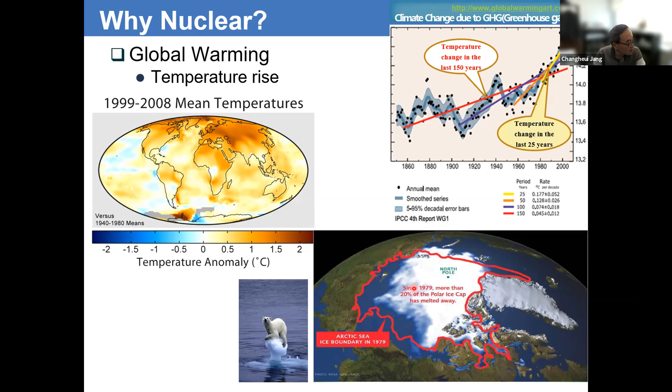So here is the trend of global warming. We know that the temperature of the globe is rising, and we see some of the famous pictures describing the reduction of the polar ice. This causes problems for many animals, but humans are also affected by global warming.

We know there are several substances that cause global warming, like carbon dioxide, methane, and nitrous oxide. Many of these global warming substances are emitted by power stations, transportation, and industrial processes. The major part of these can be substituted by carbon-free electricity sources.

Here is a graph showing the lifetime emission of greenhouse gases for several different sources of electricity. We know that coal is notorious for carbon dioxide emission, and even though natural gas is less than coal, it still emits a substantial amount. Surprisingly, even solar photovoltaic has a quite significant amount of carbon dioxide emission because of the fabrication process of those cells.

Even though photovoltaic doesn't emit carbon dioxide directly, the fabrication process and the disposal and removal of photovoltaics involve significant carbon dioxide emission. Compared to that, biomass, nuclear, and hydro relatively have a lower amount of carbon dioxide emission. Among them, nuclear has the advantage that there is no greenhouse gas emission and no pollutant, and the energy density of the fuel is quite significant.

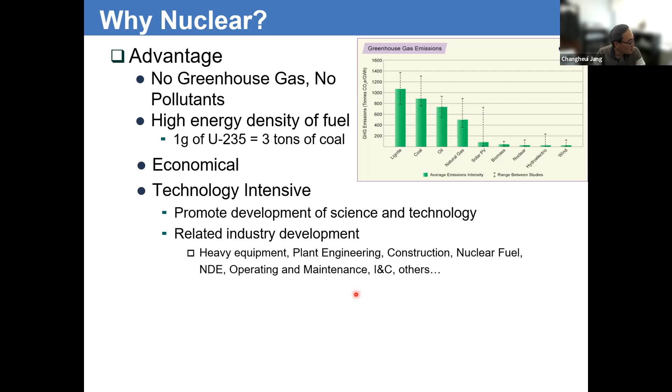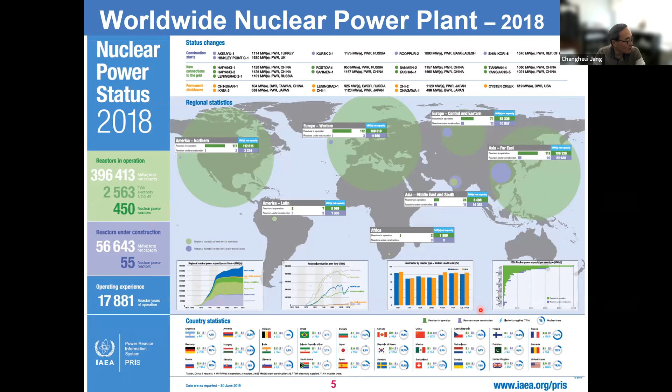Related industries can be developed as a country develops nuclear power, like heavy equipment, plant engineering, construction, fuel and non-destructive evaluation, and many other industrial sectors developing alongside nuclear power. This is worldwide statistics of nuclear power plants as of year 2018. Roughly 450 nuclear power plants are running, and around 50 or 60 are under construction. Roughly around 30 countries are operating or constructing nuclear power plants worldwide.

And we have 3 CANDU reactors utilizing heavy water. There are actually 4 APR 1400 under construction, and they are near completion. There are another 4 reactors on halted condition due to some situation, and we have 2 shutdown nuclear power plants. So overall, nuclear power is taking about 30% of electricity share in South Korea.

So here is the structure of nuclear industry and the regulatory bodies. So-called this is Team Korea, and this is the structure of APR 1400 development program. This is KHNP, they are the utility, and there is KEPCO E&C, they are architect engineering, they are basically the designer of the APR 1400. And the Doosan Heavy Industry, this is one of the biggest equipment manufacturers in the world.

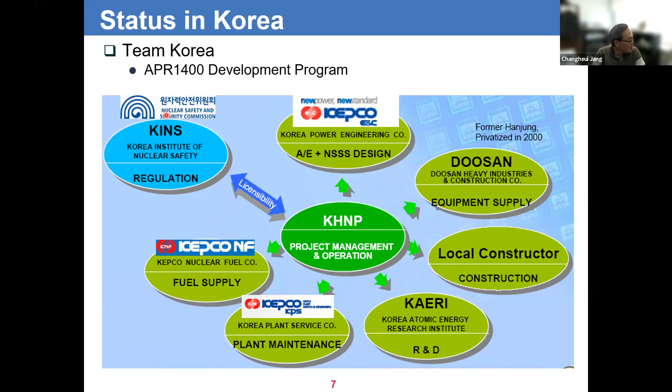And this one is constantly regulated by the Korea Institute of Nuclear Safety, so-called KINS. And on top of that, we have NSSC, that is the Nuclear Safety and Security Commission.

So this one was completed in year 2018, on time and in budget. This is a very important milestone acknowledged by the International Atomic Energy Agency and the Nuclear Energy Agency of OECD. They started commercial operation in year 2021, and the next one will also be operating maybe next year. So this is the attainment of the 4 APR 1400 units at Barakah.

In addition to that, we have submitted the design of APR 1400 to US NRC. This is basically the United States regulatory body, and then we submitted the document, and they approved the design of the APR 1400. This is actually a very important milestone because the US never ever issued the design certificate for any other country's design. So this is the first non-US design nuclear reactor design. That is a significant acknowledgement of the safety of APR 1400.

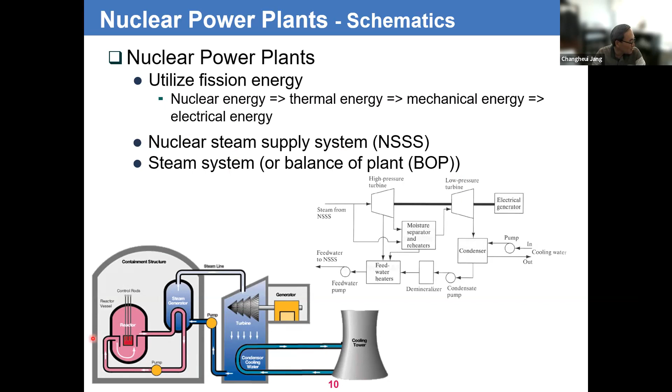So this is a brief introduction of a nuclear power plant. Nuclear power plant is the plant that simply converts the nuclear energy produced by the fission of uranium-235, and eventually through many steps of energy conversion, produces electricity. So the nuclear energy production part is called the nuclear steam supply system, and the electricity generation part is called the BOP system. So this is the NSSS system, and this is the BOP system.

So in the core of the NSSS system, this one is called the reactor coolant system or primary system of the nuclear power plant. And in the primary system, in the center of that is the reactor pressure vessel. At the bottom here, you have the reactor fuel, and then you have the steam generator, and the steam is produced, and it goes to the BOP system. So the integrity of those components, and also the material property changes of the materials used in these components, are critical for the safe and reliable operation of a nuclear power plant.

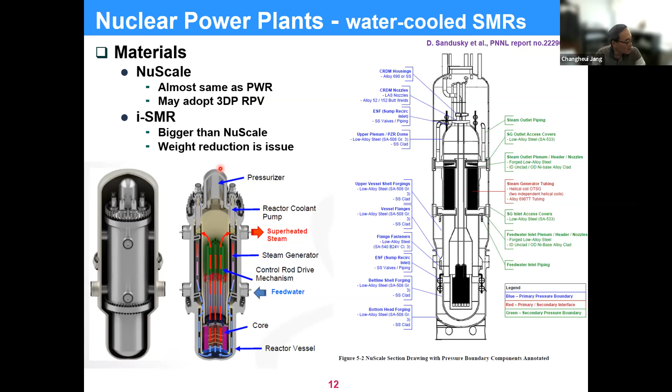In addition to that, currently the nuclear industry is interested in developing and deploying so-called small modular reactors, small size and modular type of reactors, so-called SMRs. There are actually many different types of SMRs being proposed and developed. But one of the leading SMRs based on the water coolant system is the so-called NuScale system, that is a US design system. And this is i-SMR that is designed in Korea. They are under development, aiming for highly reliable, longer life, and very economical nuclear power plants, but the size is small enough to be deployed in any other area when it is necessary.

In addition to that, there are other types of SMRs being developed, ones using coolants other than water. There are several different reactors utilizing liquid sodium or liquid lead, or utilizing high temperature helium or CO2 as a coolant. And one of the recent developments is molten salt reactors, utilizing molten salt as a reactor coolant system, having some very interesting features of safety.

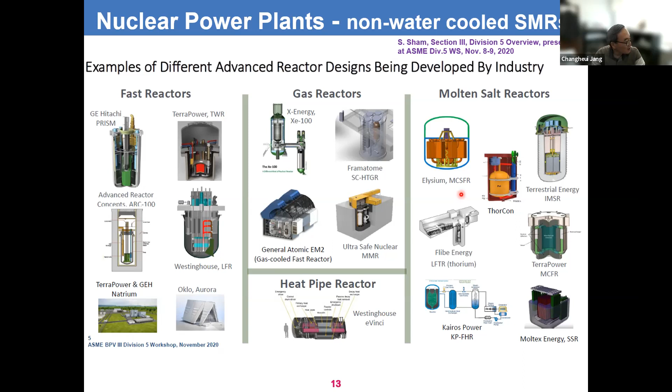So in those advanced nuclear reactors, including the light water reactors or non-water based reactors, all of the new designs are aiming for better efficiency. To achieve better efficiency, as everybody knows, you have to increase the temperature of your system.

Right now, the current reactor is operating at somewhere around 320 degrees centigrade, but for the advanced reactors, your temperature will be somewhere around 550 to 900 degrees centigrade. Because of that, you should have proper material that can have high temperature strength and also proper corrosion resistance at those temperatures. The coolants right now are mostly water, but we have a variety of liquid metals like liquid sodium, liquid lead, or lead bismuth eutectics.

Also you have molten salt, there's a fluoride-based salt and chloride-based salt, and the SCO2, supercritical CO2, and heliums. Because of those various coolants and the temperatures they operate at, we are expecting that it will be a significantly aggressive environment for the material.

So you have to worry about the corrosion, and you have to figure out how to mitigate that corrosion, or how to develop better material with better corrosion resistance. That is also important because we are aiming for the lifetime of nuclear power plants to extend from 40 years to 60 to 80 years.

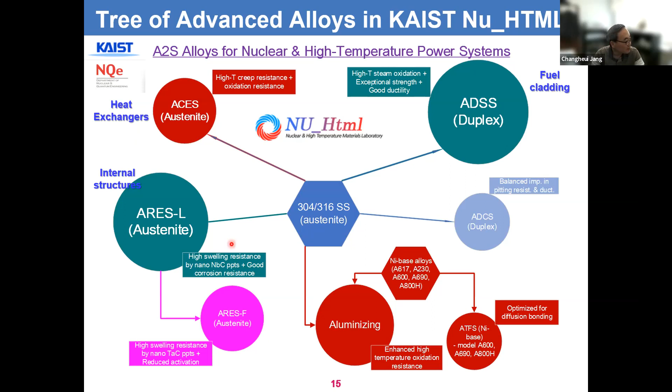There are many reasons why this accident happened, but the consequences became much more significant because of the hydrogen explosion at the top part of the reactor building. Because of that hydrogen explosion, much radioactive material was released to the environment, and we had a significant evacuation in the nearby areas.

One of the reasons the Fukushima accident became more damaging was the explosion, and that explosion was caused by hydrogen. That hydrogen actually came from the corrosion of zirconium, which is used as a fuel cladding material in water reactors.

Zirconium is known to have a very aggressive corrosion reaction at relatively high temperatures, somewhere around 900 to 1000 degrees. It produces a huge amount of hydrogen, and unfortunately this is an exothermic reaction, so it's actually a self-accelerating reaction.

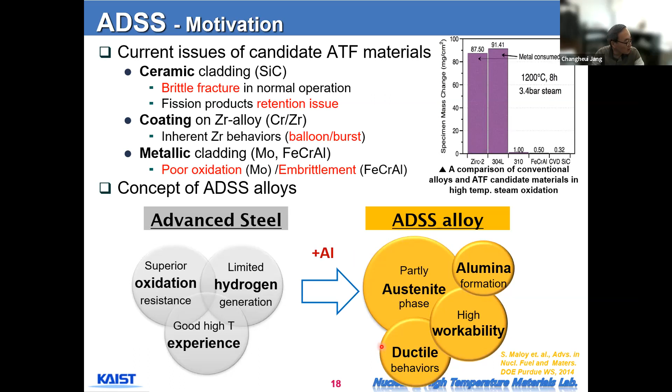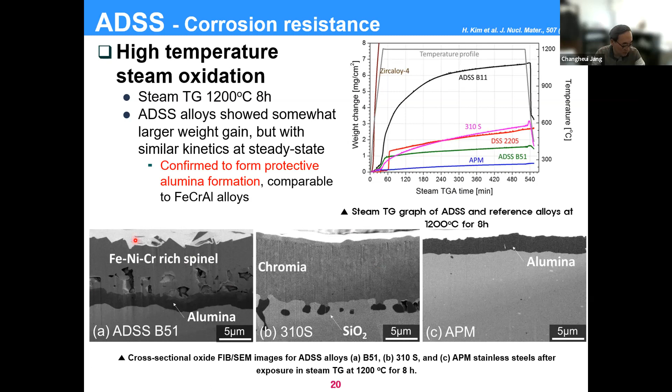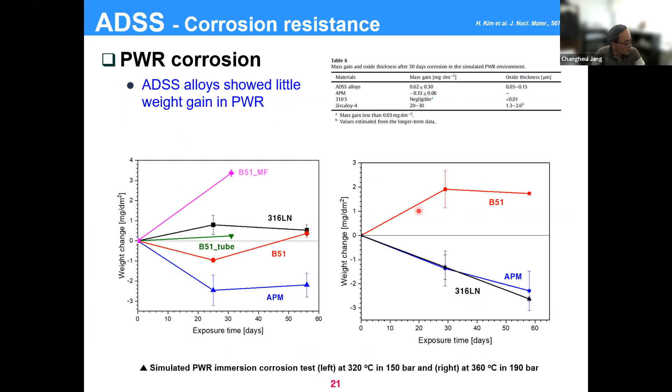Also, in the normal PWR environment, they have slightly positive weight gains. This is actually more preferable than weight losses. If you have weight losses, you have some radiological problems in your primary coolant system. So a slight weight gain is the best property in the PWR environment.

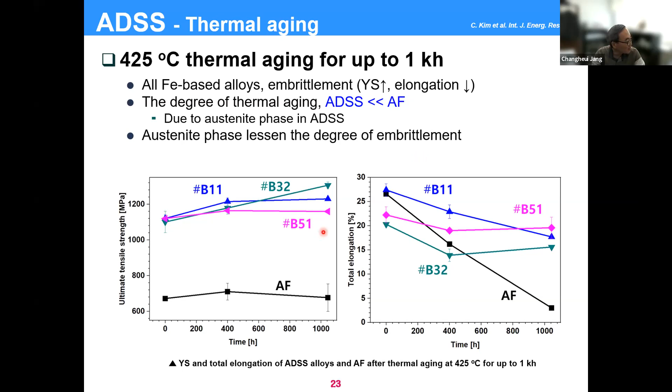Because we have ferrite, we were worried about sensitizing embrittlement issues. But as I said before, because our ADSS alloy has a certain fraction of austenite phases, the embrittlement caused by the ferrite was compensated significantly. So we can have roughly the same amount of ductility as the initial material, even though the strength increased due to sensitizing embrittlement.

Next is ARES alloys for light water reactor and high temperature applications. This is a motivation in the development of ARES alloys. Like many other structural materials, stress corrosion cracking is one of the issues for corrosion resistant materials like stainless steel. Especially in nuclear power plants, we have additional stress corrosion cracking issues called irradiation assisted SCC.

In addition, it was known that austenitic stainless steel has many good properties, but unfortunately, if this austenitic stainless steel is irradiated at relatively high temperature, like 500 degrees centigrade, it actually has volume changes. This is called swelling. This swelling is one of the key determining properties of austenitic stainless steel, and it limits the long-term use of austenitic stainless steel in light water reactors when a large amount of neutron irradiation and high temperature is expected.

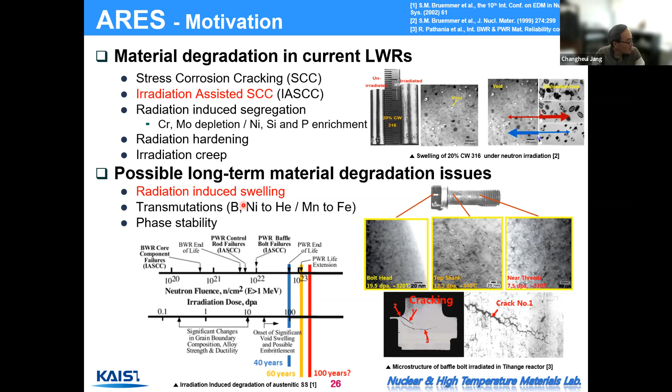This is the mechanism of avoiding swelling, but I think it's better to skip it.

There are several methods to reduce swelling and irradiation embrittlement, because neutron irradiation embrittlement starts from the formation of vacancy and interstitial pairs due to elastic scattering of the nucleus. Those vacancies then move around and combine together to form voids. The idea is that if you provide enough sink sites, enough defect sites like grain dislocations, grain boundaries, and precipitates, those vacancies are trapped by those sites and cannot form large voids. That is the basic idea of irradiation resistant or swelling resistant material.

There are several different methods. For the formation of nanograins, you need severe plastic deformation, which is not very practical for large components. Dislocation and nanoparticles have some advantages, but also have limitations. For FMS alloys, ferritic martensitic steel and ODS alloys are good, but ODS fabrication also has fabrication issues. High entropy alloys and twin boundaries are currently at a very early stage of development.

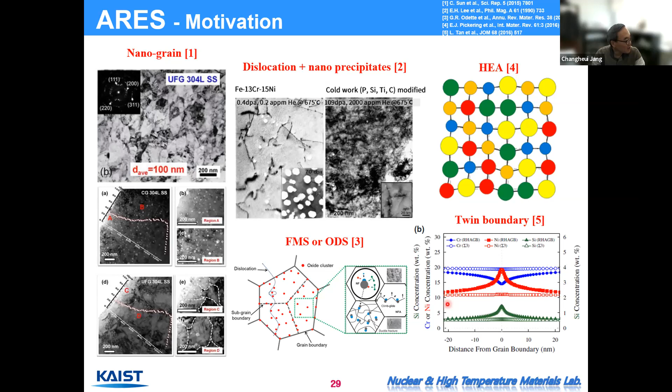Our idea is to precipitate a huge number of nanoscale carbides within the matrix by properly controlling the composition and mechanical processing. This provides a significant amount of sink sites, so we can have swelling resistance and irradiation embrittlement resistance.

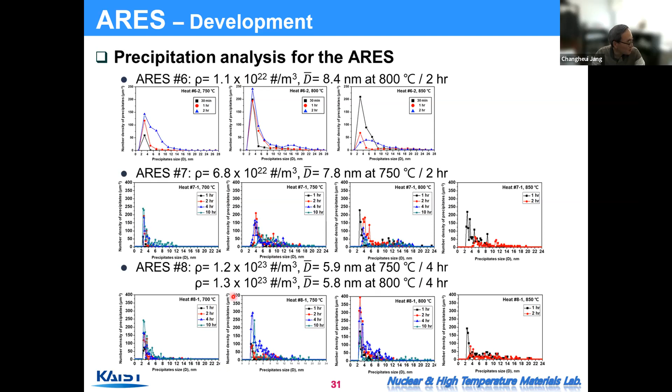This photo shows the precipitation of a huge number of nanoscale carbide precipitates, and this is the measured data. We have 10 to the 22nd or 10 to the 23rd number of precipitates per cubic meter. The size is from 8 to 6 nanometers. We have an increase in strength and reduction in ductility, but still around 10 to 20% ductility, so that's not a big problem. We also have better corrosion resistance.

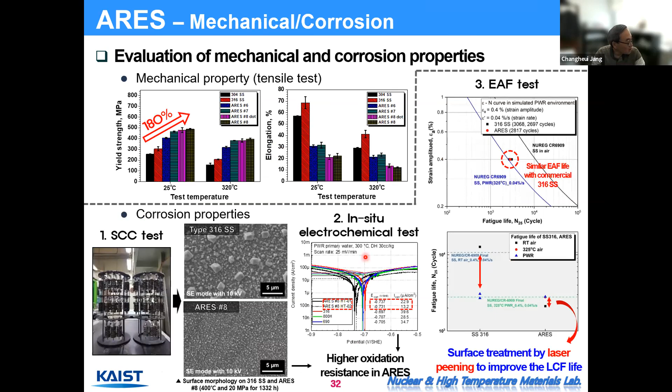But in advanced nuclear power plants, the amount of neutron irradiation is much, much greater than 8 dpa. We expect somewhere around 200 dpa at the highest point. So we irradiated the material at 200 dpa, this time at Texas A&M.

This is again a comparison of the conventional alloy and our developed alloy, showing measured volume increases. Compared to the 316, which has around 25% volume increase, we have less than 5% volume increase. So there's a huge difference in terms of volume change.

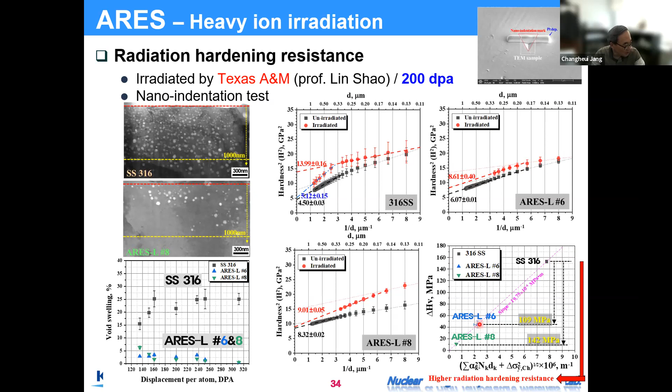Also, the degree of embrittlement is significantly reduced from conventional 316, which is 150 - we have roughly less than 50. So this is also a significant decrease in embrittlement.

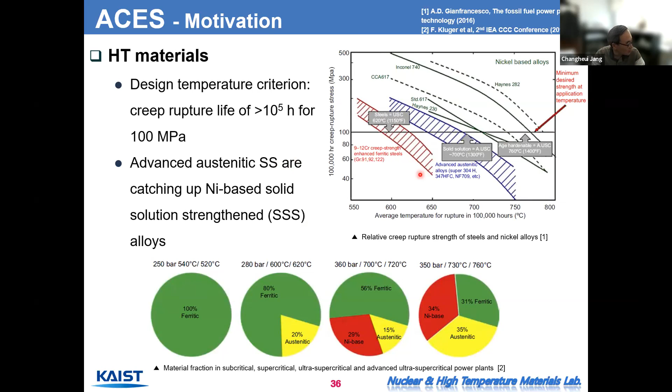For that purpose, the alumina-forming alloy has been developed by Oak Ridge National Lab in the United States, with roughly 20 to 23% nickel and about 3% aluminum added. Because of those alloying elements, they have gamma prime and NiAl B2 phase formation at high temperature, which contributes to creep resistance.

But still, because of the low amount of aluminum and relatively low amount of chromium, their corrosion resistance is not as good as other high temperature materials.

Our idea is that for improvement of high temperature oxidation resistance, we try to increase the aluminum content and also add more titanium for better creep resistance. But it's well known that titanium is bad for high temperature oxidation, so we wanted to balance the amount of titanium and aluminum for balanced creep and corrosion resistance. We increase both aluminum and titanium together to get a better combination of creep and corrosion resistance at high temperature. This is one of the alloys we developed.

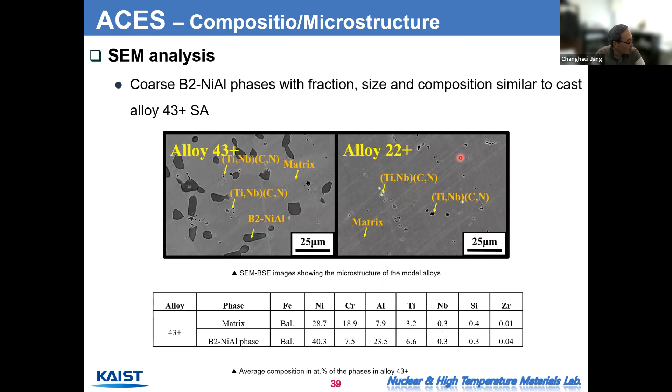We have roughly 4.5% aluminum and 3.6% titanium here, and this one has a little bit lower content of aluminum and titanium.

This is a summary of the creep test results of our alloys, at 750 degrees and 150 MPa. Our test alloys have around 500 hours as creep life. This is significantly longer than the AFA alloys, but at a little bit lower loading. At 100 MPa, we have comparable creep life to the other AFA alloys.

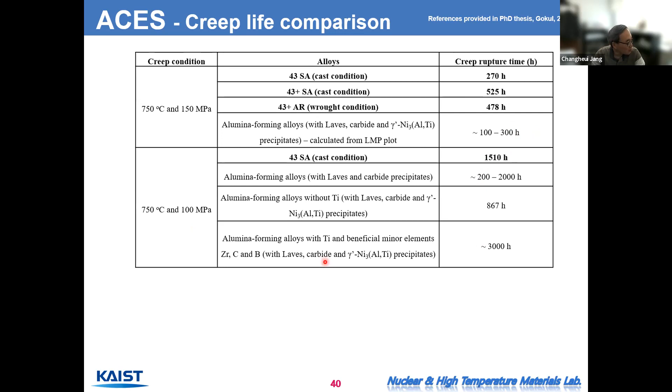With that comparable creep resistance, we compared the oxidation resistance. This is the oxidation resistance of one of the alloys we developed, compared with the AFA alloys. In the supercritical CO2 environment, we have roughly 3 or 4 times lower weight gain, and that weight gain becomes even lower when we have pre-oxidation.

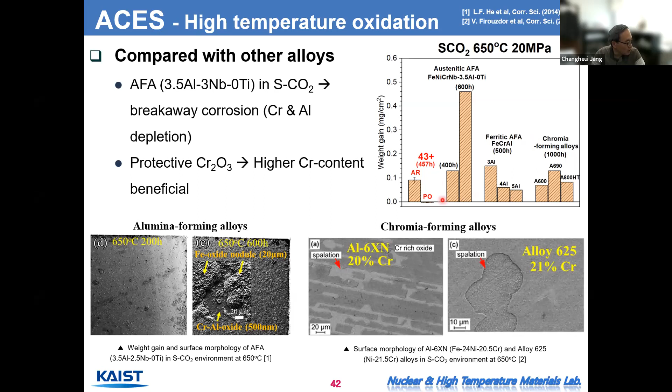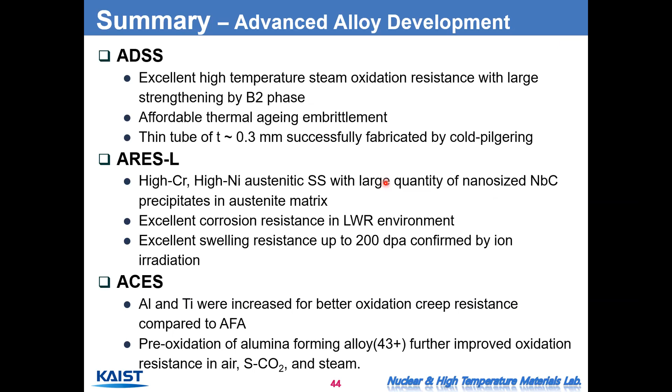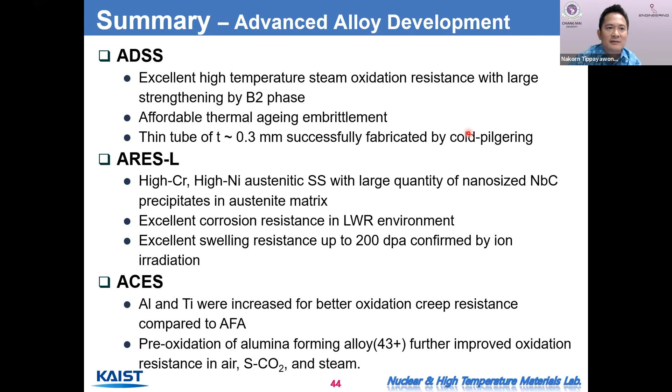A quick question, please. In terms of manufacturing, would these advanced alloys be able to be manufactured by typical industrial factories, or would specialization be needed? We developed all these alloys using VIM melting, hot rolling, cold rolling, and the conventional heat treatment process. So our target is basically to utilize the conventional steel-making process. We don't have any fancy fabrication process, so it can be scaled into tons or 10 tons. Thank you.

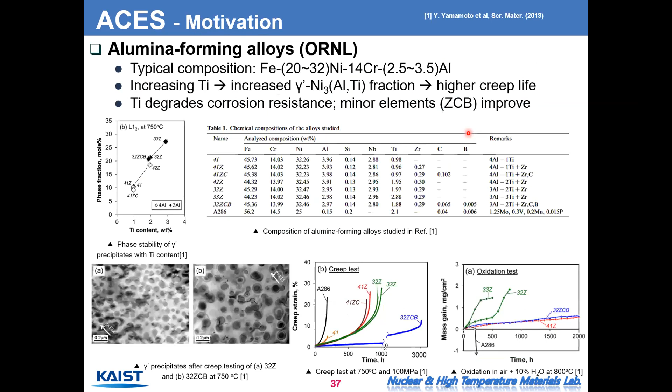Professor Jang, I have one question. We know that good cladding material requires low neutron absorption capability. So what is your take on the materials you have developed for cladding materials?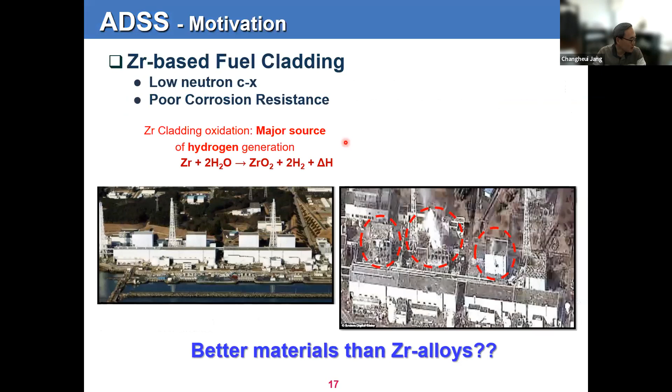Yeah, that is actually a good question. We know that zirconium has a very low neutron cross section. But we add nickel, and also we have iron and chromium, so they have a fairly large amount of neutron absorption cross section. So the idea is to compensate those absorption cross-section differences, you have to decrease the cladding thickness from the current 0.5 millimeter to 0.3 or 0.35 millimeters. But if you want to decrease the thickness, you have to increase the strength of the material, and also it should have a certain ductility. So this is the reason why we favor a high strength material with a certain amount of ductility. The thickness became smaller, and you have a slightly bigger fuel pellet within the cladding material.

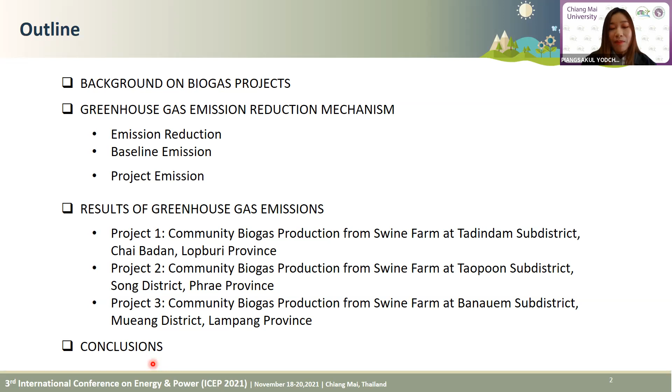This research work focuses on the reduction of greenhouse gas emission from the anaerobic wastewater treatment process of swine farms to produce biogas, preventing greenhouse gas from entering the atmosphere. 3 biogas plants were built in 3 different provinces in Thailand. The first biogas project consists of 3 swine farms with total capacity of 400 cubic meters of biogas, built at Tadindam Sub-District, Chai Badan District, Lopburi Province, supplying 130 households.

The second project has capacity of 300 cubic meters of biogas, built at Taopoon Sub-District, Song District, Phrae Province, supplying 188 households. The third project consists of 3 swine farms with total capacity of 600 cubic meters of biogas, built at Banauem Sub-District, Mueang District, Lampang Province, supplying 252 households. Not only do these projects help reduce the release of methane to the atmosphere, but they also provide biogas to households in nearby communities for cooking fuel, replacing LPG at the same time.

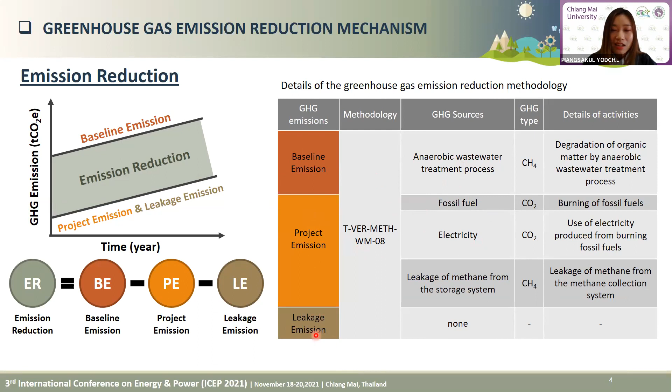Project emission is calculated from the amount of carbon dioxide released from burning fossil fuels, use of electricity, and the leakage of methane from the storage system. But in this project, fossil fuel was not used in operation and no greenhouse gas emission from biogas leakage occurred, so these parameters are equal to zero.

So emission reduction is calculated from this equation.

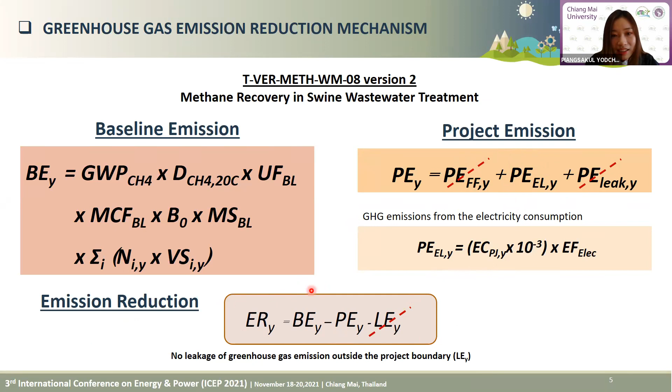Results of greenhouse gas emission in project 1: only methane emissions from the degradation of volatile solids from pig farm wastewater by anaerobic wastewater treatment process is considered in calculating the greenhouse gas emission for the baseline emission.

Carbon dioxide emission from electrical energy from the biogas pumping and the leakage of methane from the storage system are used in calculating greenhouse gas emission for the project emission. And there is no leakage of greenhouse gas emission outside the project boundary.

We found that the project greenhouse gas emission reduction certified in 2020 by TGO is 1,716 ton carbon dioxide equivalent, which is 2.57% higher than expected greenhouse gas emission reduction due to the increase in the number of pigs during the certified year.

Same as project 1, in project 2 we found that the project greenhouse gas emission reduction certified is 658 ton carbon dioxide equivalent, which is 15.23% higher than expected greenhouse gas emission.

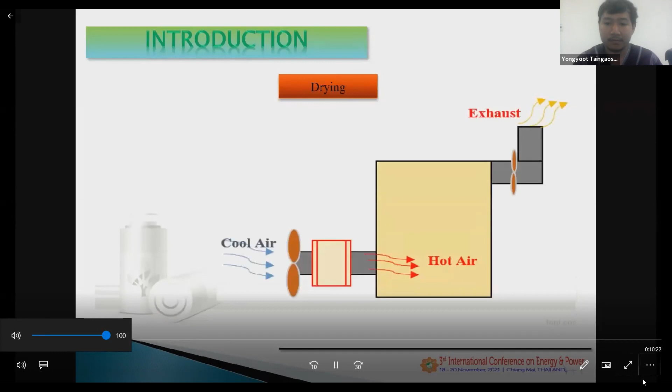Drying is one of the most essential techniques for improving food quality, extending shelf life, and potentially increasing market price of agricultural products. However, relatively high energy consumption during the drying process of hot air dryers is increasing production cost. It is estimated the drying process consumes about 60% or more of total energy necessary for food processing and manufacturing.

The waste heat is responsible for most of the energy lost in the drying process, as the hot and moist air is directly evacuated from the drying chamber. It is a matter of economic urgency to design and develop energy-saving equipment for traditional food dryers. Waste heat recovery technology is an efficient tool to reduce energy consumption and is widely used in the food industry.

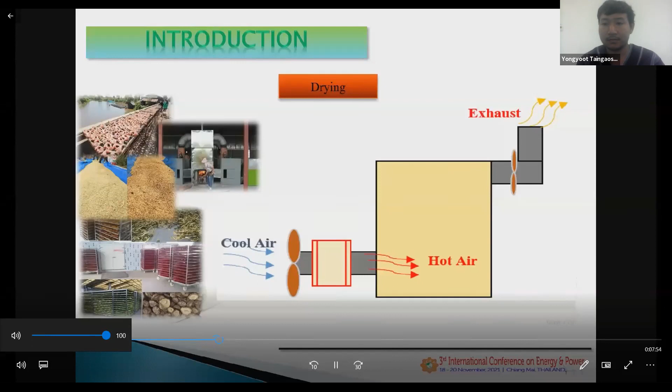Material and methods. The dryer has a performance of 10 kilowatt and approximately 1 cubic meter drying chamber, about 1,000 tubes with a dimension of 0.15 meter.

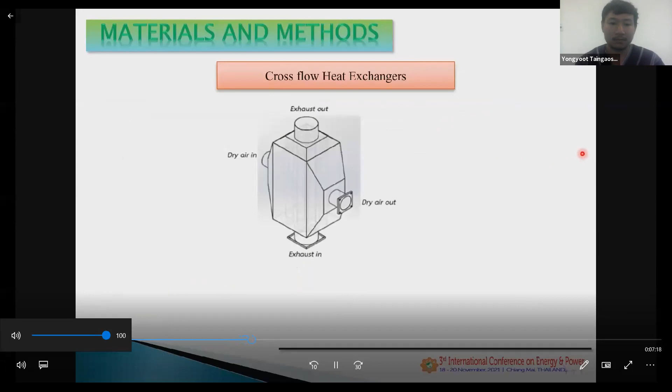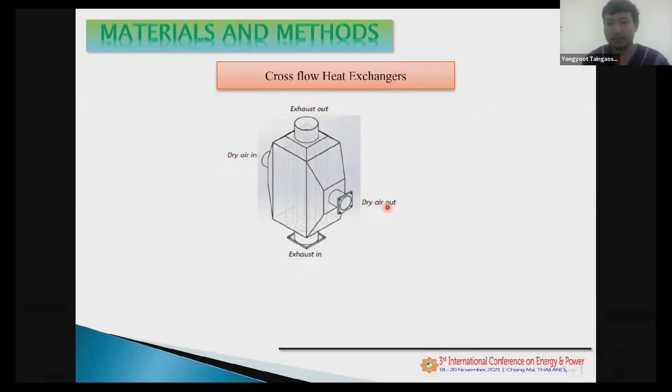Designing of a cross-flow heat exchanger, you can see on the picture. This is exhaust in, there's exhaust out. This is dry air in and dry air out. The heat exchanger was composed of food grade stainless steel SUS 304 with a thickness and thermal conductivity of 1 millimeter and 15 watt per meter Kelvin respectively.

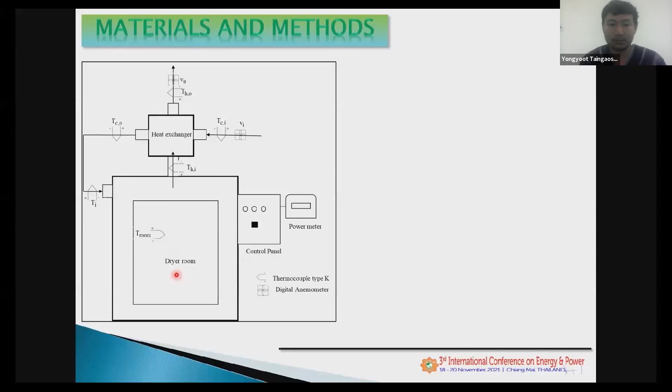You can see on the diagram, this is the diagram of this experiment. You can see the position of the heat exchanger on top of the dryer. 1,000 grams of water in a container was placed at the center of the drying chamber, which functions as the drying load.

Drying temperature was set to 100 degrees Celsius. Exhaust air velocity at the heat exchanger outlet was adjusted to around 1.0 meter per second, with mass flow rate of 0.017 kilogram per second, and 1.5 meter per second with mass flow rate of 0.025 kilogram per second.

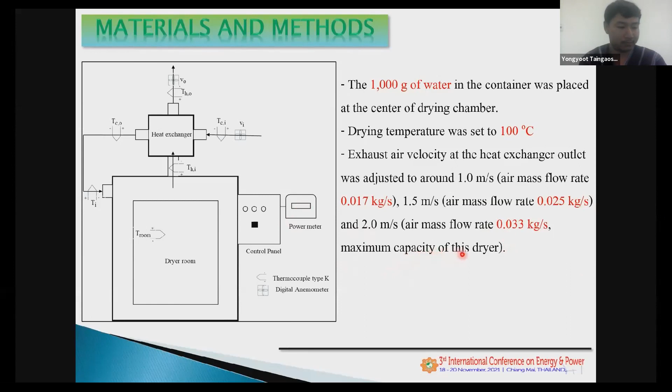The last condition is 2.0 meter per second, with mass flow rate of 0.033 kilogram per second, which is the maximum capacity of this dryer. We experimented for 1 hour, measuring temperature at different places and dryer electrical power consumption every 5 minutes. At the end of the test, the water container was weighed to determine the amount of water evaporated during the drying process.

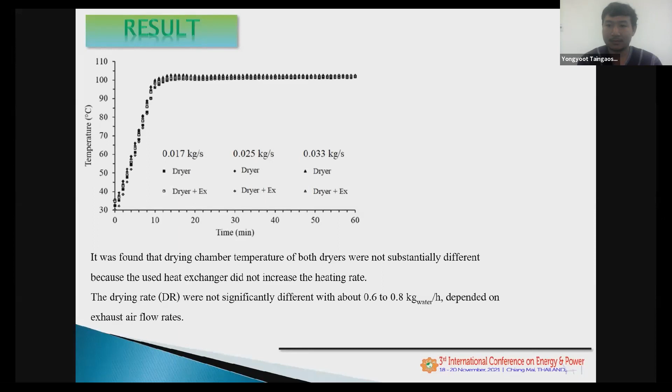On the graph, we found that drying chamber temperature of both dryers were not substantially different, because the heat exchanger used did not increase the heating rate. So the drying rates were not significantly different, with about 0.6 to 0.8 kilogram water per hour, depending on exhaust air flow rate.

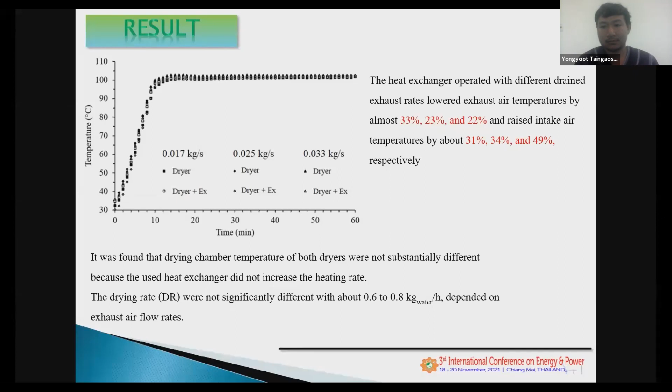The heat exchanger, when operated with different drain exhaust rates, lowered exhaust air temperature by almost 33%, 23%, and 22%, and raised intake air temperature by about 31%, 34%, and 49% respectively.

The addition of a heat exchanger reduced the dryer's overall electrical power consumption by about 14%, 22%, and 24%. It also reduced waste heat from the dryer by around 25%, 37%, and 49% respectively. The energy efficiency of the dryer was increased by 14%, 24%, and 28%.

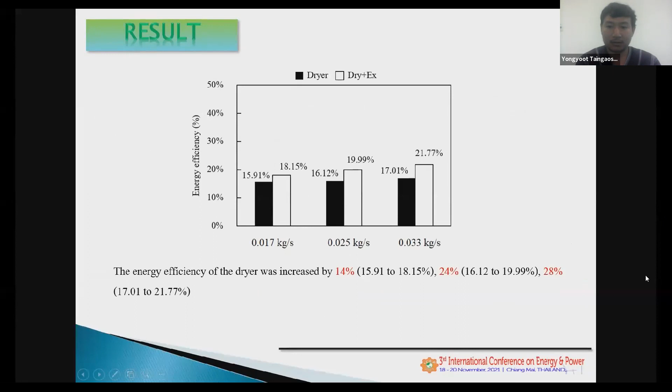In terms of SMER, by about 14%, 24%, and 28%, and 12%, 19%, 22% for SEC.

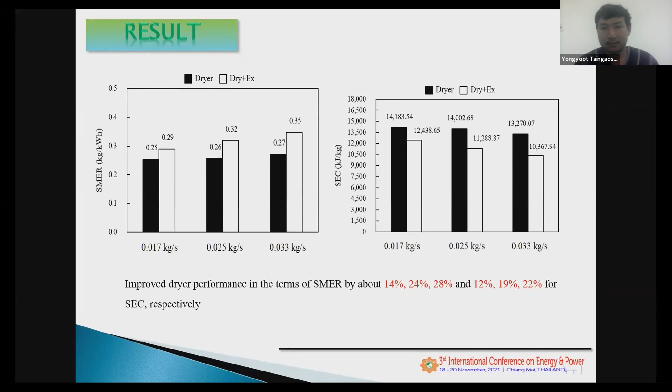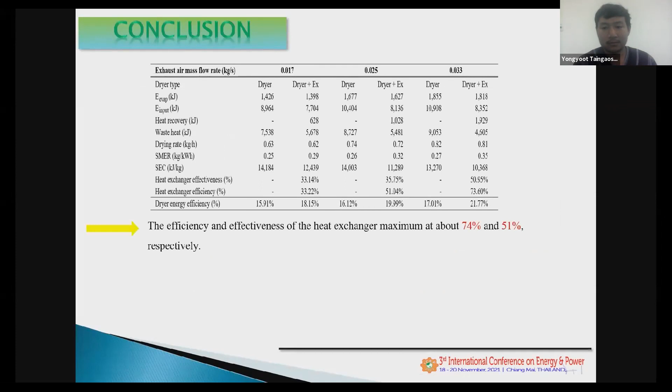So the conclusion of this research, you can see on the table: the efficiency and effectiveness of the heat exchanger maximum at about 74% and 51% respectively. The electrical power consumption of the dryer was reduced by 0.71 kilowatt-hour, which accounts for an energy saving of almost 24%.

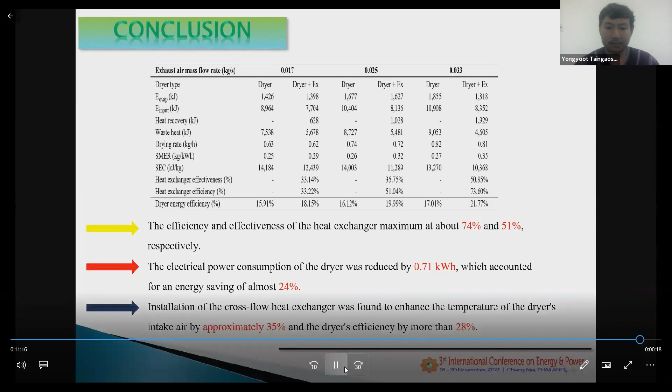Installation of the cross-flow heat exchanger was found to enhance the temperature of the dryer intake air by approximately 35%, and the dryer efficiency by more than 28%. Thank you for your attention.

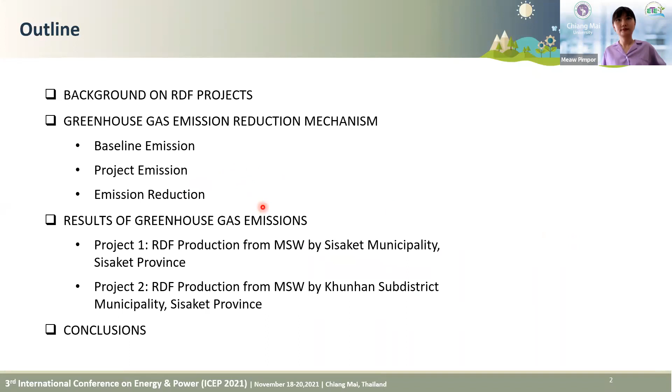The background: this research focuses on greenhouse gas emission reduction from anaerobic process in landfill by producing RDF. Two RDF production plants were built in Sisaket province, Thailand. The first RDF project is in Sisaket municipality with capacity of 87 tons per day. The second RDF project is in Khun Han sub-district municipality with capacity of 20 tons per day. Municipal solid waste within the municipality and nearby within 200 kilometers were used.

The greenhouse gas emission reduction mechanism: RDF is produced by mechanical and biological treatment technology. In the fermentation process, bacteria decompose organic matter in the waste. In the mechanical process, the pile is reversed to achieve better biodegradation and prevent methane from anaerobic digestion. After that, the waste is sieved to separate organic matter as soil amendment, and finally produce RDF.

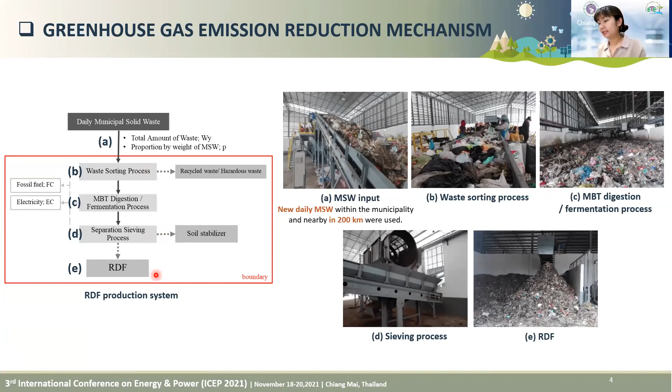The reduction of greenhouse gas emission depends on how much methane can be contained from the degradation of volatile solid waste by anaerobic process in landfill. The emission reduction can be calculated by methodology directed by the Thailand Greenhouse Gas Management Organization, or TGO. Calculation methodology used in this project is T-VER-TOOL-WASTE-01 for calculation of greenhouse gas emission in the base case, assessed from degradation of volatile solid from waste by anaerobic process in landfill, and T-VER-METH-WM-04 for calculation of greenhouse gas emission.

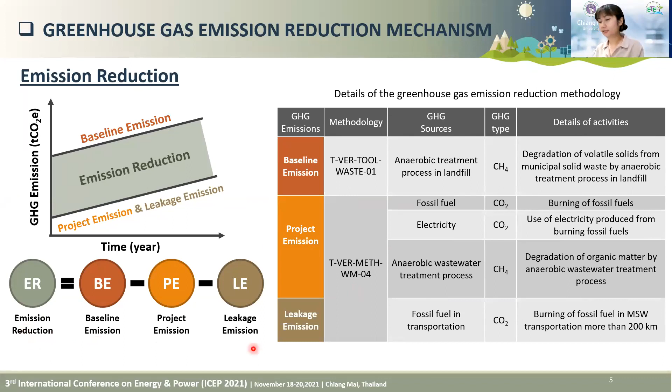In the project case, assessed from carbon dioxide emission from burning fossil fuels and electricity consumption produced by burning fossil fuel in the project, and sometimes methane emission from fermentation process. Greenhouse gas emission involves baseline emission, project emission, and leakage emission.

The baseline emission equation is given by equation 1. The equation aggregates quantity of waste to be eliminated by other means instead of landfill, multiplied by proportion by weight of woods, papers, foods, textiles, twigs, and leaves, and multiplied by correction factor according to the methane correction factor, based on the type of landfills.

The project emission equation is given by equation 2. The equation aggregates emission from use of fossil fuel and electricity, sometimes from anaerobic wastewater treatment process, in unit ton carbon dioxide equivalent per year. The emission from fossil fuel consumption is given by equation 3, which aggregates the amount of fossil fuel consumption and net calorific value with emission factor from burning fossil fuel. The emission from electricity consumption is given by equation 4, which aggregates the amount of electricity consumption and emission factor from electric generation in the grid system.

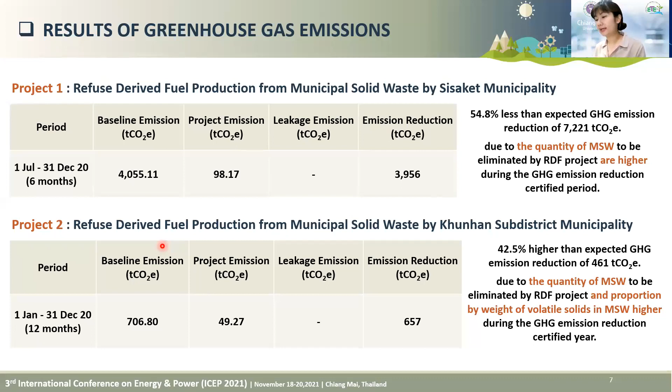Conclusions: the total certified greenhouse gas emission reductions for these two RDF projects are 4,613 tons carbon dioxide. The amount of greenhouse gas emission reduction depends on the quantity of municipal solid waste to be eliminated by the RDF project and the proportion by weight of volatile solids.

The municipality with a bigger administrative area contributes much more greenhouse gas emission reduction, resulting in more collection of solid waste. Required data and documents must be recorded using calibrated instruments according to the calculation detail provided in the project design document to obtain the accurate amount of greenhouse gas emission reduction.

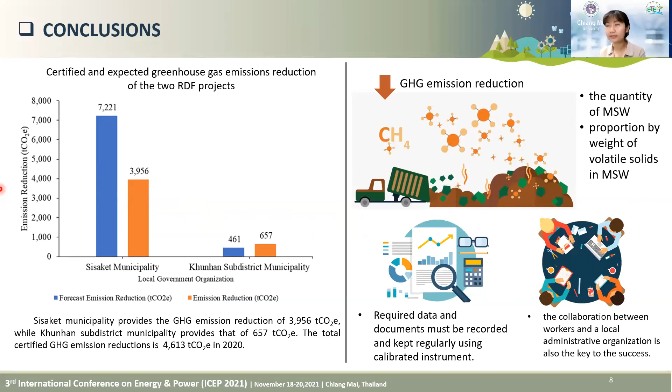The collaboration between workers and local administrative organizations is key to the success of greenhouse gas emission reduction. Thank you for your attention.

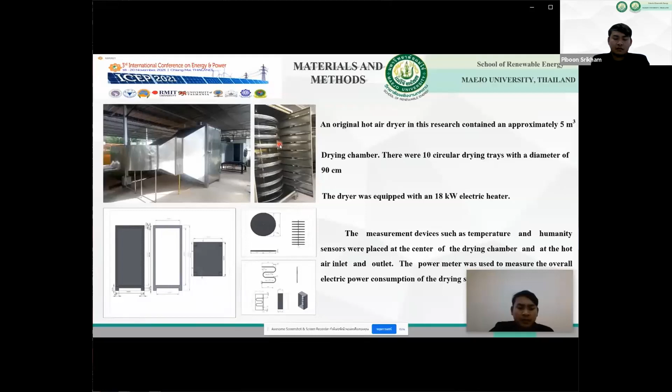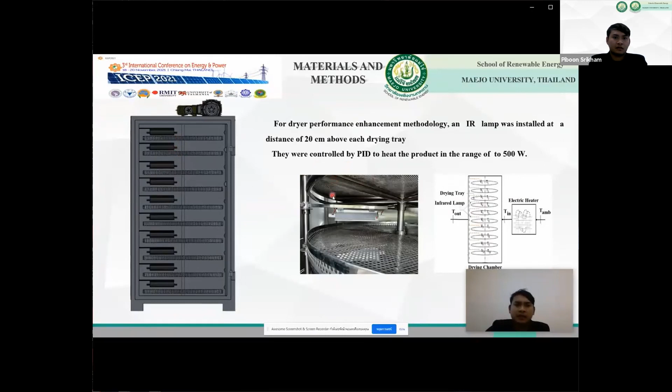The original hot air dryer uses a reserve hot air technique with approximately a 5 cubic meter drying chamber. There are 10 circular drying trays with a diameter of 90 centimeters. All drying trays can be rotated, with the rotation speed at a rate of 1 to 10 rotations per minute. For dryer performance enhancement methodology, an IR lamp was installed at a distance of 20 centimeters.

Experimental setup: the objective of the experiment was to evaluate the performance of the original hot air dryer compared to a modified version equipped with an infrared heating system. This leads directly to my next point.

The experiment used 10 kilograms of banana slices with a standard initial humidity of 60% by weight, dried with hot air at 45, 55, and 65 degrees Celsius, compared to the use of hot air combined with 300 watts of infrared at the same temperature and speed.

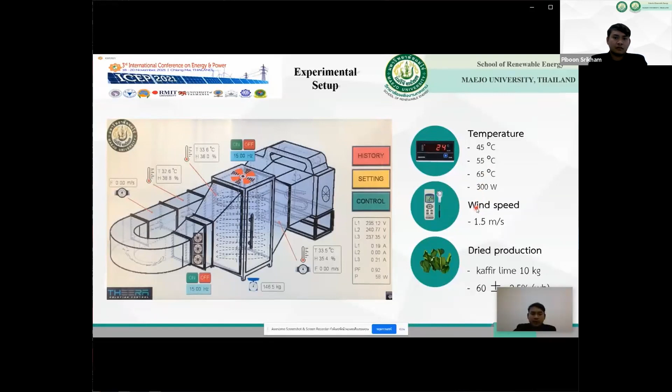Results and conclusion: from hybrid drying, the drying time was reduced to 200, 120, and 110 minutes when operating with hot air temperatures of 45, 55, and 65 degrees Celsius, leading to time savings of about 70%, 67%, and 49% respectively.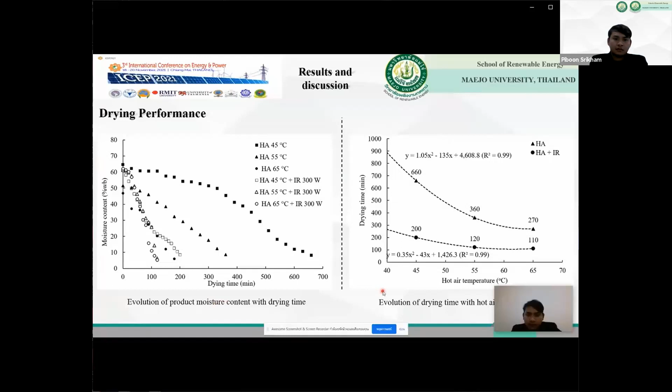The hybrid system has a higher overall drying rate, showing an additional quantitative drying increase of 230%, 200%, and 145%, which refers to converting hot air to infrared as the modified dryer operated.

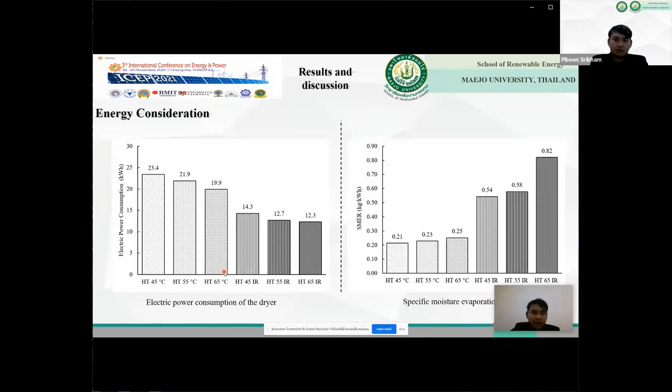Detailed results found that the hybrid process produces a purified product with a noticeable difference in drying time, energy efficiency, and product quality. Higher process temperature produces the final dried product with a more bold color and certain traits that result in a lower market price.

This hybrid drying method compared with traditional hot air drying significantly improves the drying performance and reduces process time and energy consumption. In the case of 65°C hot air combined with 300-watt infrared, the maximum energy efficiency of the dryer increased from about 16 to 45%, with reduced drying time and reduced power consumption by 70%.

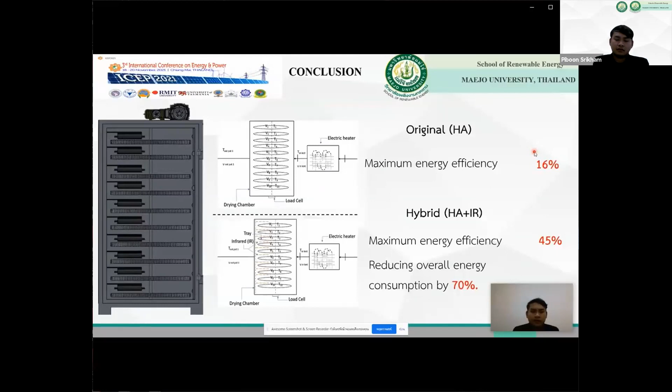This work was partly supported by the Thailand Agricultural Research Development Agency, National Research Council of Thailand, Maejo University, and Chiang Mai University.

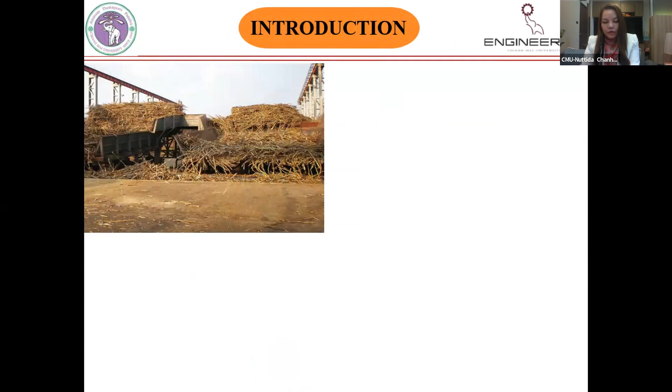In recent years, biomass has become a rich biorenewable energy source such as woody biomass, straw, and agricultural materials. Biomass is available in large quantity in many regions, and is important for the production of organic chemicals because of its abundant renewability and wide distribution. Considering possible downstream chemical processing technology, the conversion of sugar to value-added chemicals is very important - for example, biomass derivative conversion to plastic, to ethanol, and others.

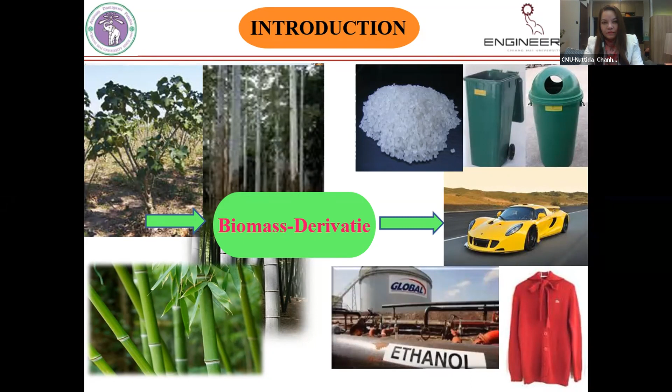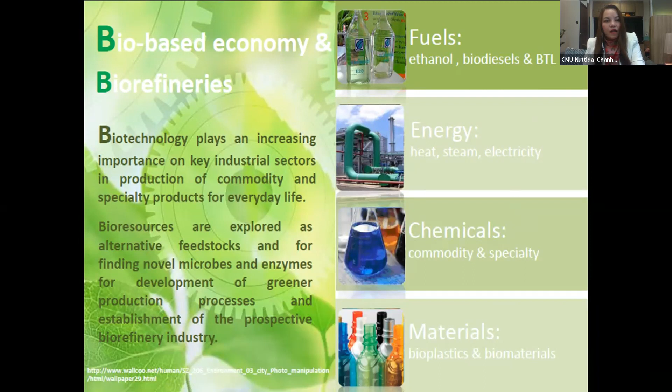This is the bio-based economy and biorefinery trade. In this sense, biotechnology plays an increasing importance in key industrial sectors, producing commodity and specialty products utilized including fuels such as ethanol, biodiesel, and BTL; energy such as heat, steam, and electricity; and chemicals, commodities, and specialty materials such as bioplastics and biomaterials.

Biorefineries continue to develop, and recently we have been interested in research on lignocellulosic biomass and biorefinery towards biological resource materials, so-called bioresources, derived from living matter. Refineries typically follow the conventional term derived from the petroleum-based refining process system. Biorefinery products include bioethanol, biodiesel, bioplastic, and biochemicals.

In this work we are interested in the experimental conversion of sugar to biofuels, called DMF. The objective was to investigate the conversion of glucose and fructose to HMF as an intermediate for producing DMF by acid hydrolysis reaction. The acid concentration, time, and temperature were varied in order to obtain the highest yield of HMF.

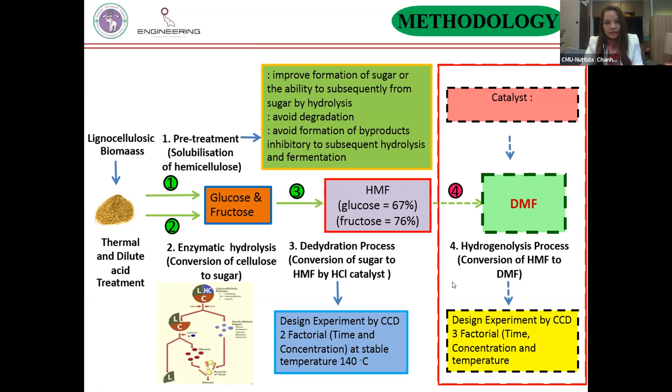The slide shows the experimental procedure for dehydration of sugar to HMF. In this work, two types of sugar were used, including glucose and fructose.

First, concentration of hydrochloric acid, 20 milliliters into a flask, mixed with 20 milliliters of sugar, glucose and fructose respectively. After that, heated in an autoclave at 140 degrees Celsius for a reaction time of 30 to 40 minutes, then sampled and injected into the high performance liquid chromatography to analyze HMF respectively.

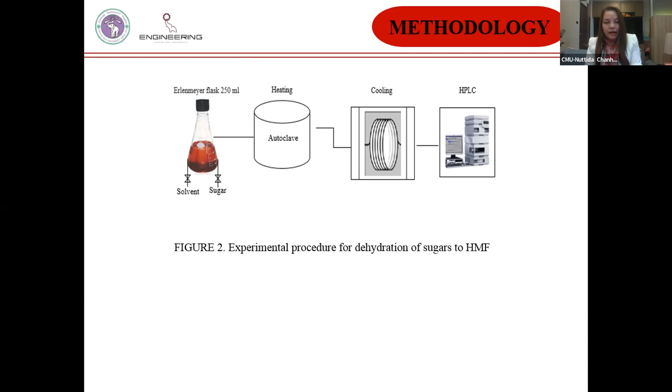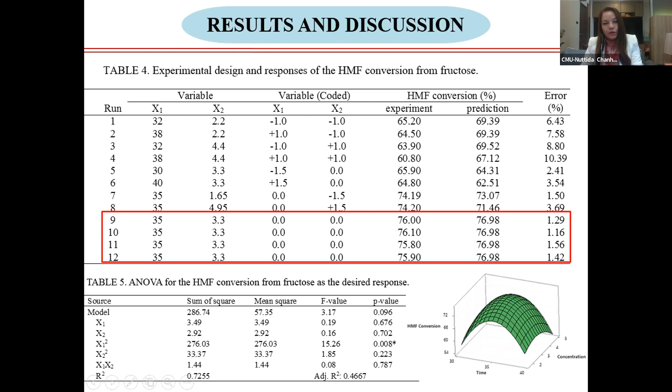In conclusion, the research examined three factors in converting glucose to 5-hydroxymethylfurfural (HMF) by dehydration: acid concentration, time, and temperature. The highest yield occurred at acid concentration of 3.3% weight by weight and time of 35 minutes, giving an average yield of 67% from glucose and 76% from fructose respectively.